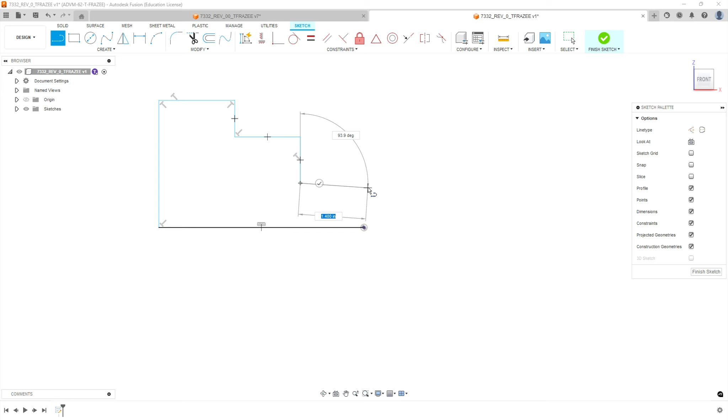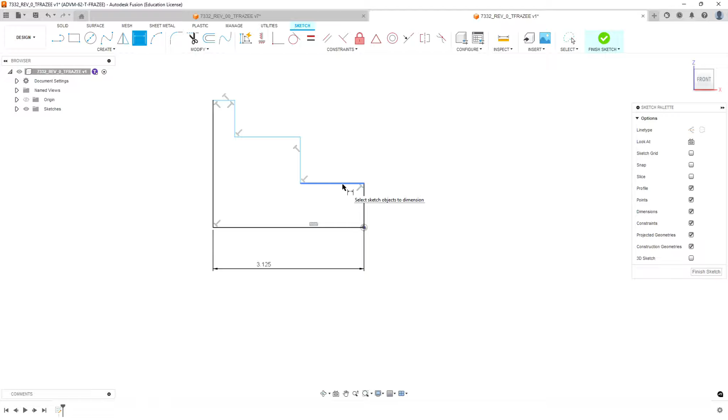Alright, so you should have some constraints that already go in automatically. Our overall length of the part, the finished part, is 3 inches. Set this dimension to 3 inches - the video is incorrect. And if we look at our drawing, the length of this leg on the right, this very first one, is 490 thousandths.

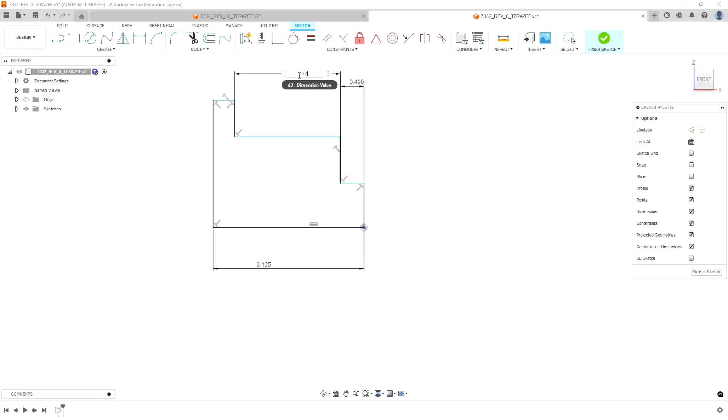Our next one is 1 inch 10 thousandths from that edge. And then our last leg should be taken care of by the overall length.

Now we need to do radiuses. So we have our first one is a 1.496 to 1.498. We're going to do that right at the middle of the tolerance, at 1.497. So 1.497 divided by 2 gives us the radius.

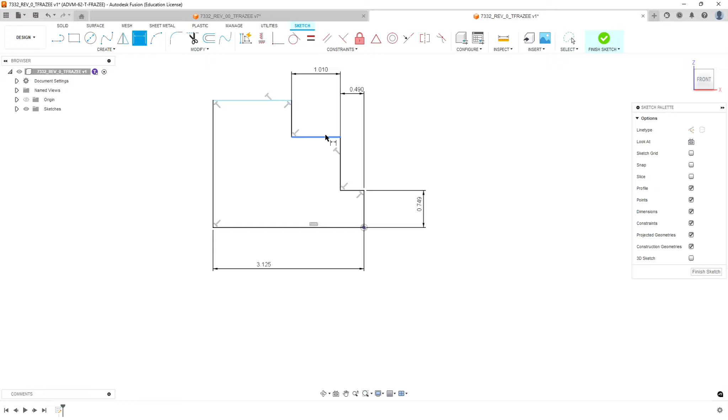Alright, we're going to go back to the next one, and our next diameter is 2 inches 494. We're going to divide that by 2 as well to get a radius.

And then our last diameter is 3 inches, so it's 1.5 for the radius. That should give us a fully constrained sketch. Okay, and this overall length is 3 inches.

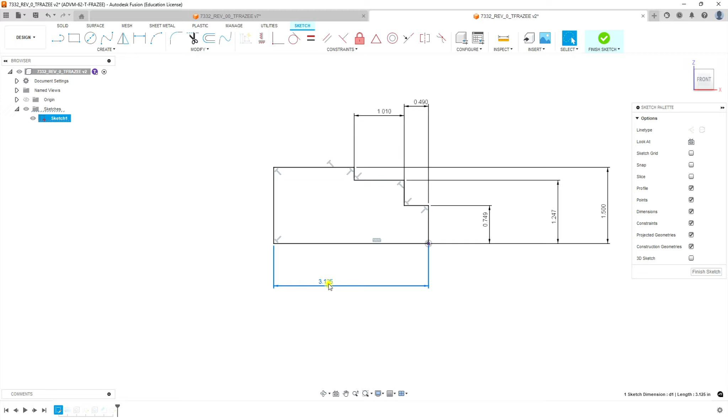Hit finish. We're going to go to revolve. We're going to select the straight line as our revolve axis, and we should have the main feature of our part made now. Okay, next what we're going to do is put the next primary feature in,

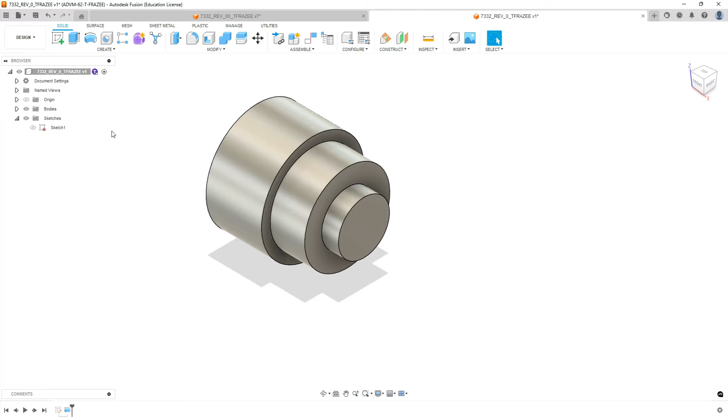which is the hole in the center. We want that all concentric. So we're going to create the hole, and do a plain hole type, no tap, clearance all the way through. We don't care about the drill points because we're going all the way through, so we're going to select all. We are going to pick a countersink hole type so we can put at least the countersink on the top of the hole there. This software doesn't have the capability to do it on both ends, but some software does.

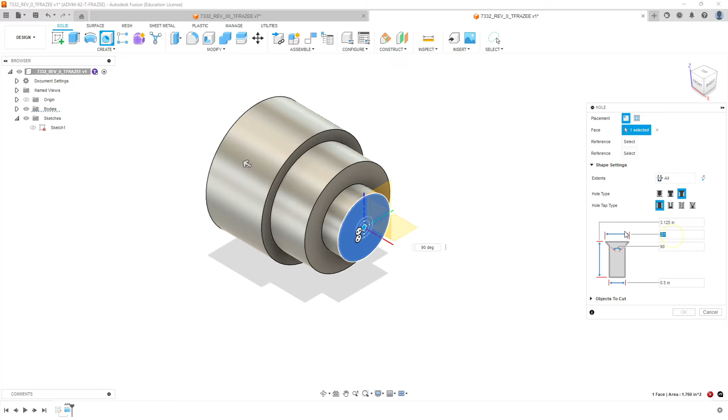Okay, we're going to select our plane and move the hole to snap to the center. We need to look at our parameters: our hole diameter is a half inch. And our countersink angle is 90, and our countersink diameter is 560 thousandths. Gotta remember that decimal. We're gonna hit OK.

So now we have the hole feature going through the center. Now let's prepare a sketch for the dowel pin hole. So we have a location dowel pin hole that's intended to clock this, so you can take it on and off the machine and have it clocked in the correct orientation. It also keeps it from spinning because we're going to be bolting this with a drawbar going all the way through the part.

Okay, so we need to create a sketch to put this 1 inch from the center. You could use other methods, but I prefer to put a sketch that way we have something hard there that we can change. So we're going to go sketch, and do a line. We're going to go from origin, straight up.

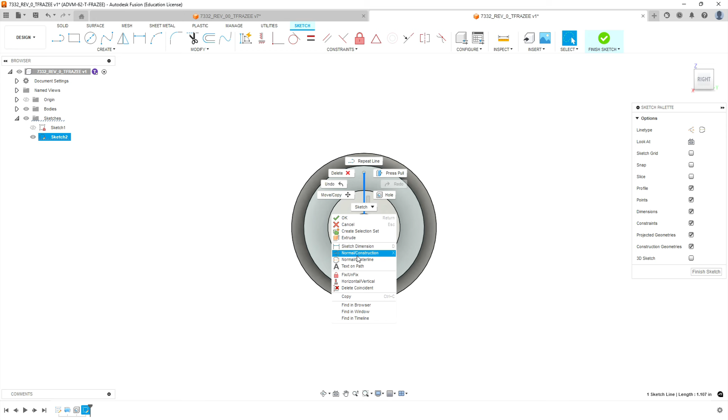We're going to left click on that line and then right click on it, make it construction, and that should be 1 inch long. And there we go, we just finished that sketch.

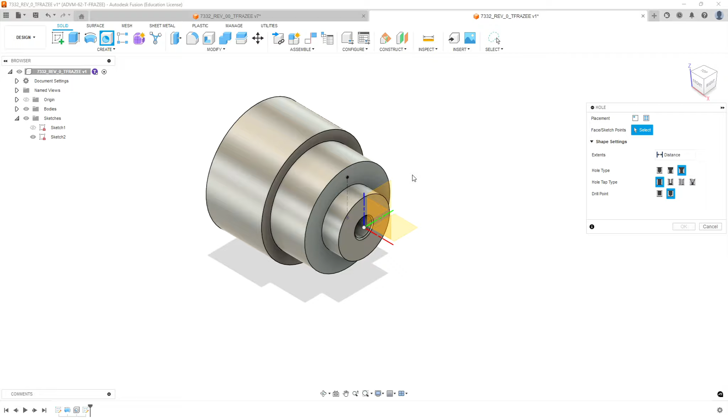Now we're going to go to Hole Wizard and create the hole that's going to go there. So we're going to do the same thing, countersink, plain hole. This one is going to be blind, so we do want a drill point. And then we're going to do our selection, which is on that point we just created.

Now the default size is the last hole size we made. So what we're making is a 0.251 to 0.253 hole.

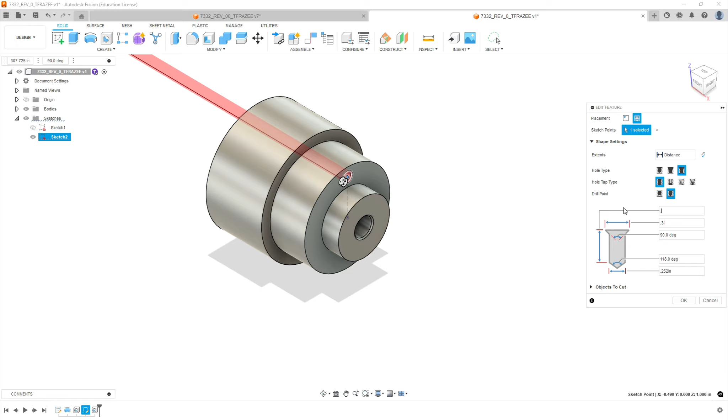Okay, now all we have is chamfers. So we have one here, and to put the countersink on the opposite side, we're going to use the chamfer tool. So let's go to Modify, we're going to go to Chamfer, and our first selection is going to be this outside chamfer here, and they're all different sizes on this thing.

So we have a 50 thousandths chamfer there. And then we're going to add another selection, which will be this edge, which is just a general edge break of 10 thousandths.

Okay, and then we go to the other side, and we need to do a little math to figure out what this one is. We have to convert the countersink diameter to a chamfer dimension. So it is 560 thousandths, and the hole is 500.

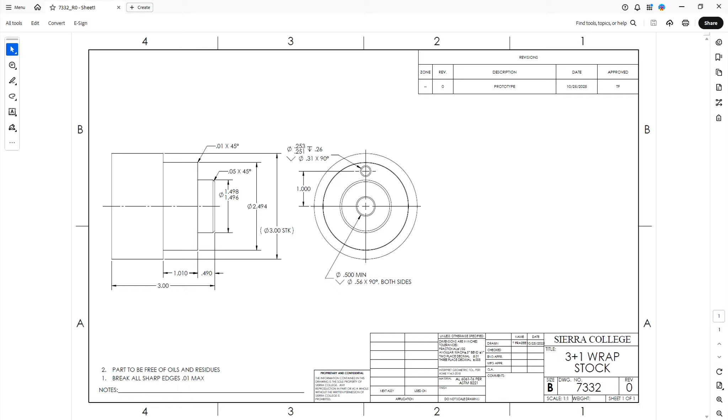So if we get our handy dandy calculator out, you have a 0.56 hole, or chamfer diameter, on a hole that is ½ inch. So we're going to subtract a ½ inch from that number. That gives us the difference between the diameters, but the chamfer would be in a radius. So we're going to divide that by 2, and it's a 30 thousandths chamfer as the conversion.

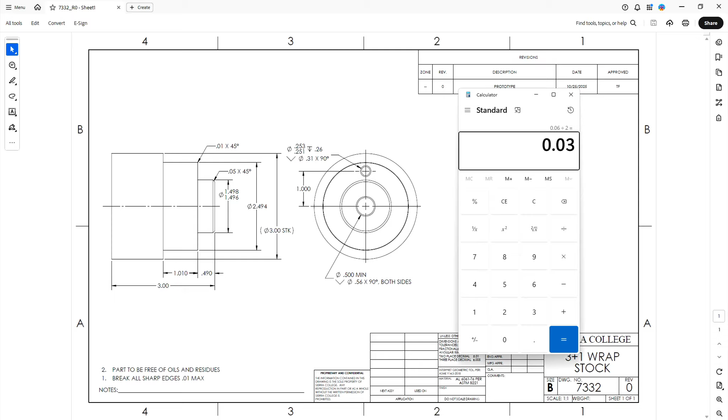Okay, so we're going to go back to Fusion, and we're going to select a new selection set. We're going to pick the opposite end of the hole, and 0.03 is our number. Okay, and we're done with that.

Okay, we've now successfully modeled the part. Make sure you're saving a lot.

Okay, so we're going to make stock on this. We're going to make stock to go around. It's easier to register things with fixtures if you model the stock.

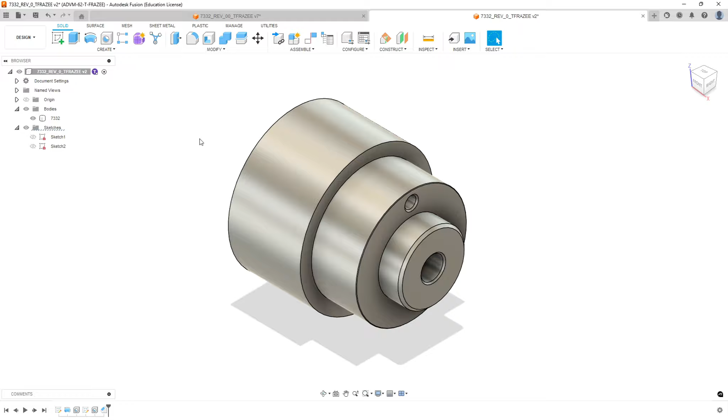So what we're going to do is a sketch on the back side of the part. And there's a couple ways you can approach it. What I'm going to do is create a projection, and we're going to select the outside diameter of our part, and we're going to hit OK.

And so it shows up as purple, but this will tie it to the size of this, and we're making it out of 3-inch bar stock. So if we change the bar stock size, it'll automatically update this model. I'm going to hit Finish Sketch.

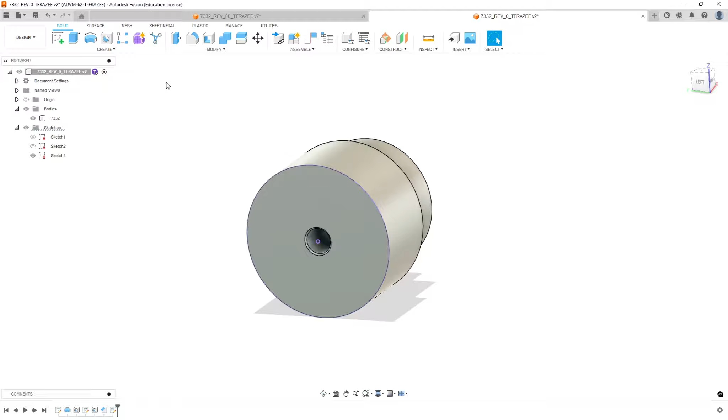We're going to do an extrusion, and we're going to select our outside profile, but we also have to select the edge where the hole is. So we want it solid as if the stock was being created. We're going to go to 2 sides.

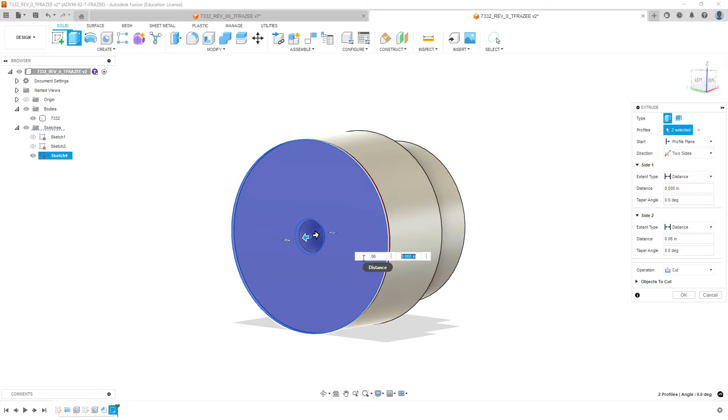The first side is 0.06 and the second side is going to be 3.06. So we're taking 60 thousandths off both sides. Yeah, it looks like I got those boxes backwards, so bear with me here.

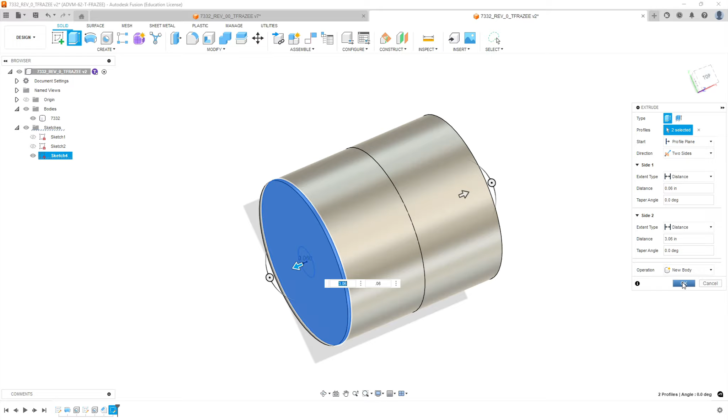And then we don't want it to be a cut, we want it to be a new body. Okay, we can see the new body's enveloping the other model. We hit OK, and the second body shows up here. We call this stock.

Okay, we're going to right click on stock and go down to opacity control, and make it 50% so we can see our part inside the stock. Okay, we have our part modeled, we have the stock around it modeled.

Now we need to bring in our vises. And we're also going to use a device called a V-block. So pull in a vise from the assignment, and we're going to pick 1 1/8 inch tall parallels.

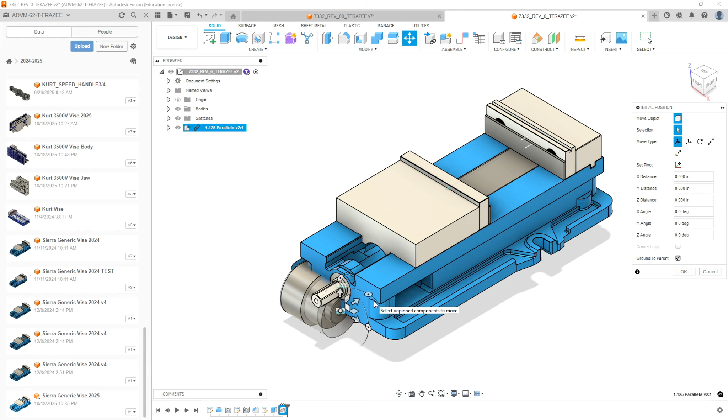And we're going to rotate the vise in the orientation for the first operation. So we need to rotate this 90 one way and 90 the other way. And let's move this out of the way because the first operation is going to be just milling this face here.

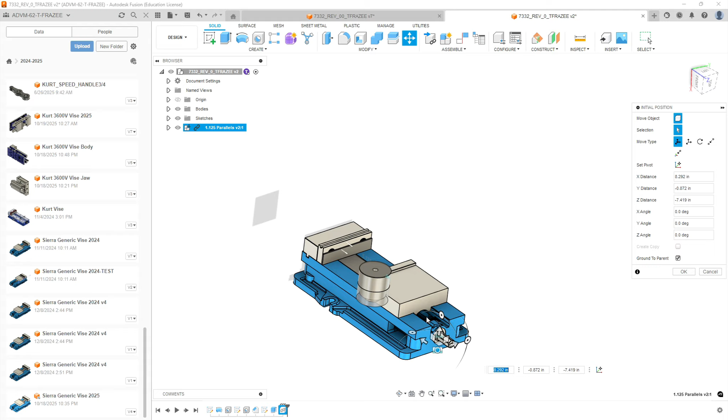Now I found assembling these things with cylinders is a little tricky using square fixturing. So we're going to hit OK. For our first entity we brought in, we need to unground it from parent so that our joints can be successful.

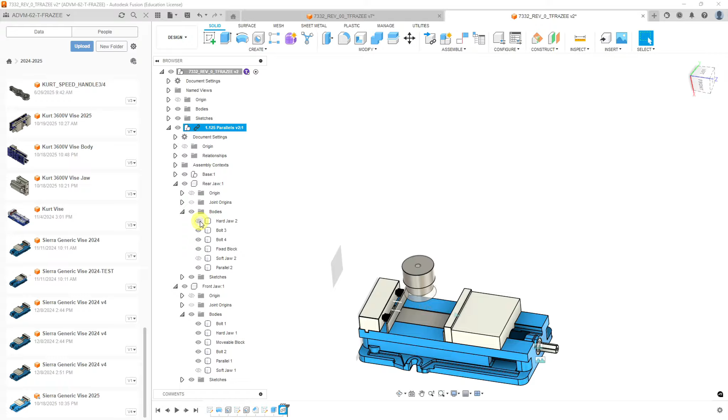And we're going to expand our vise here, and we're going to do something a little unorthodox, but I want to expand the rear jaw and the front jaw and look at all the bodies. So make sure the bodies are open, and we're going to hide the fixed jaw just temporarily on this, and we're going to go to joints.

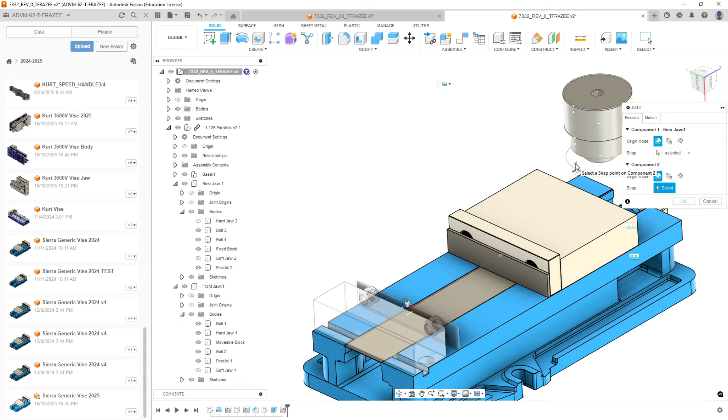This will allow us to pick on the back plane of the parallel, and then we can pick on the corresponding location where it would hit tangency on our cylinder. Okay, and that way it'll align it. And again, you have to have snap points enabled for this, to have those icons show up.

And we're going to make the hard jaw visible again. We're going to put a V-block in here that's going to go where this parallel is. You can put 2 parallels under this when you machine it, but it's not going to be there. So what we're going to do is hide the parallel on the rear jaw, or the fixed jaw. Okay, now we can collapse all this stuff up.

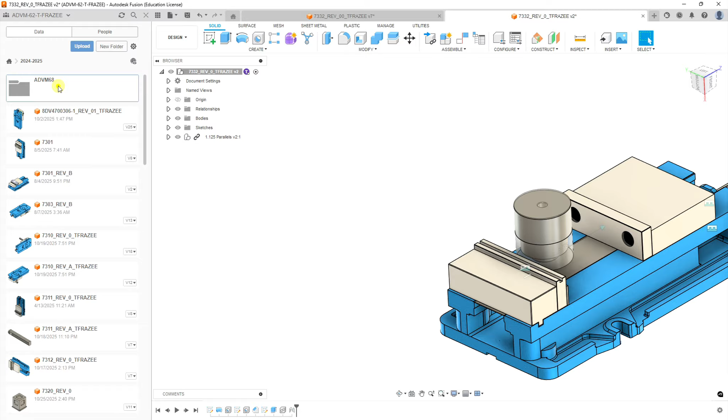And we can go to our library and pull in the V-block that's part of the assignment, and pull that over. We go 90 and 90. That puts it in the orientation the V is going to grip onto the cylinder.

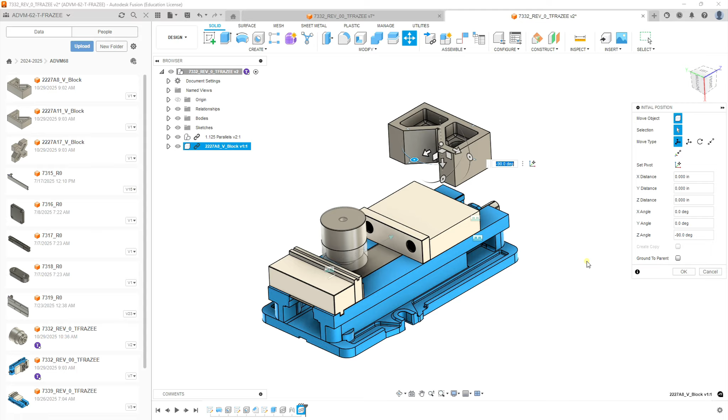We hit OK. Now we're going to go to joints. We're going to pick the center of the rear jaw and the center corresponding spot on our V-block, and we're going to hit OK, and that should assemble it where it needs to go.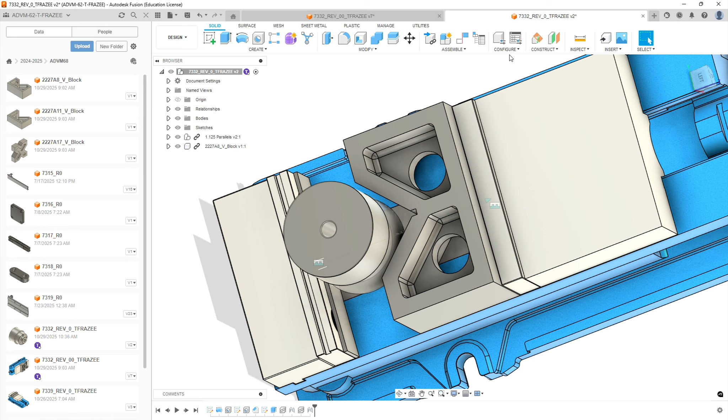Now, so that the V touches the cylinder and this looks convincing, we're going to go to tangent relationship, and we're going to make a relationship between one of the flat faces and the cylinder of our part, and that should emulate our first operation.

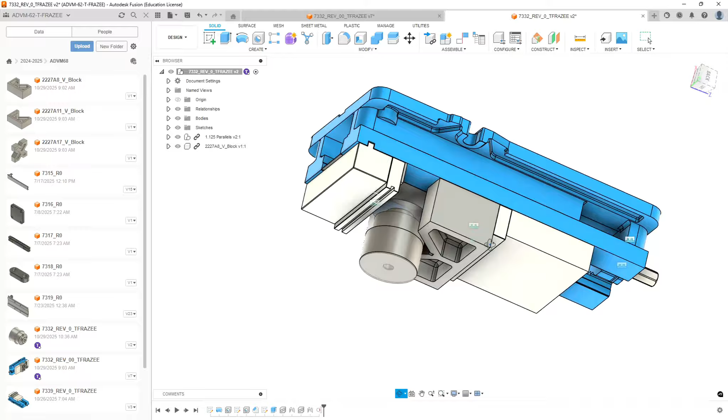Now we're going to go to the opposite side and look at flipping the part like this. So let's hide our vise. And we're going to bring in a second instance of that vise with the same height parallels. Inch and an eighth. Hit OK.

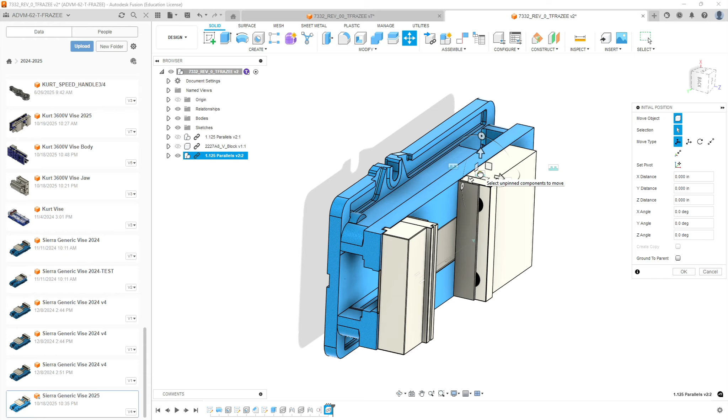I can't see our part. Let's move it. We got to rotate 90 like this. Move it into position.

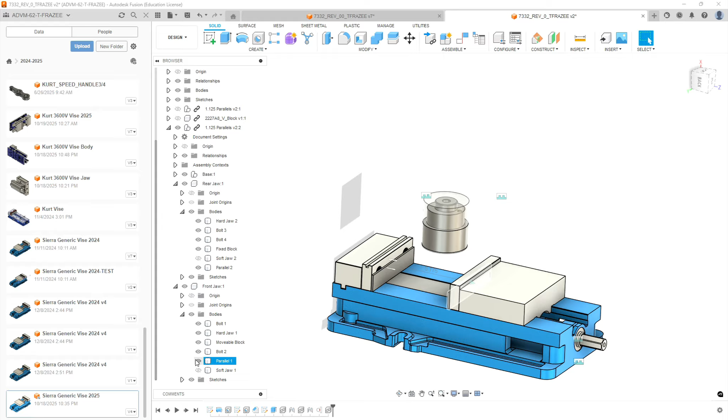Hit OK. We're going to expand that vise, front and rear jaw, bodies for both. We're going to hide the parallel in the back, and hide the hard jaw temporarily in the front. We need to make the joint on this between the finished part edge that's been milled off on the face and the parallel.

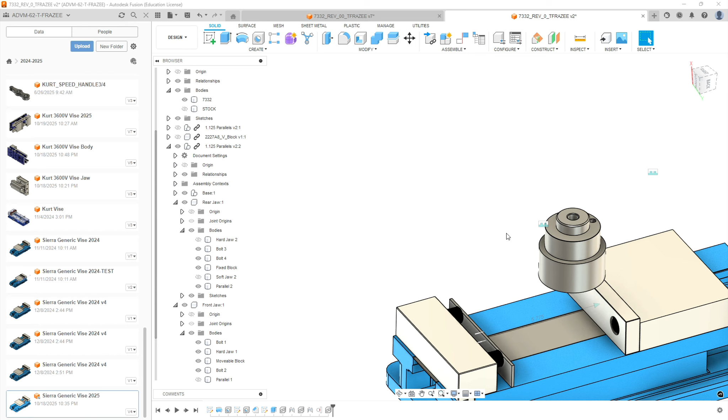So to make things easier, we're going to go to the bodies and hide our stock model, and we're going to assemble this with a joint from the back of the parallel to this corresponding edge on the model. And the reason we're doing that is this bottom edge here has been machined to finished size.

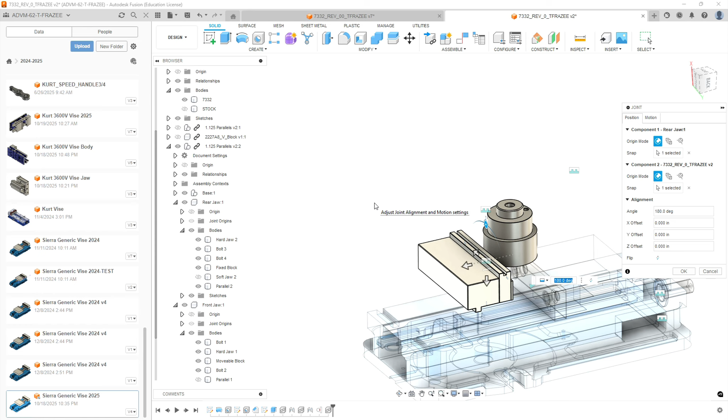So if you pick the stock, your setup's going to be off by how much you removed from the first operation. Alright, we're going to hit OK.

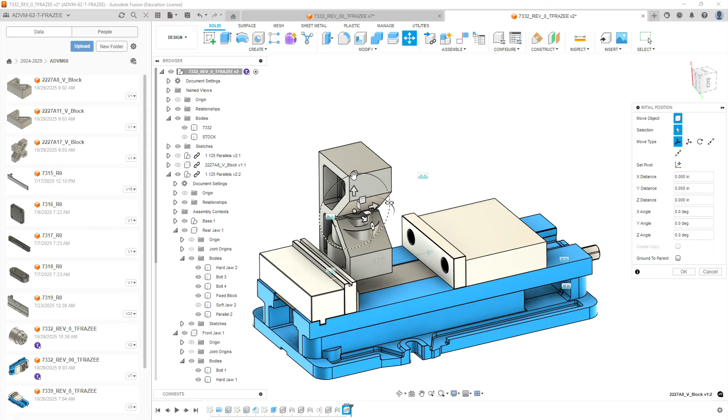Now we need to go in and bring in a second instance of the V block. Need to put it in position. Two 90-degree flips.

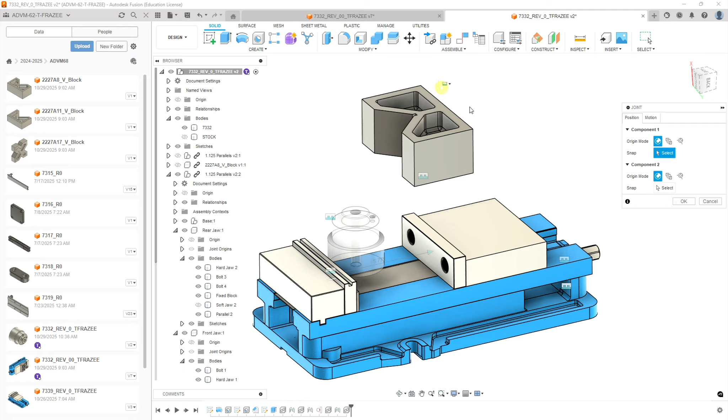We're going to assemble, we're going to joint, center of part, center of the V block, hit OK. That puts it in place. Now we need to go to assemble and put our tangent relationship between the V block and our part. We're going to hit OK.

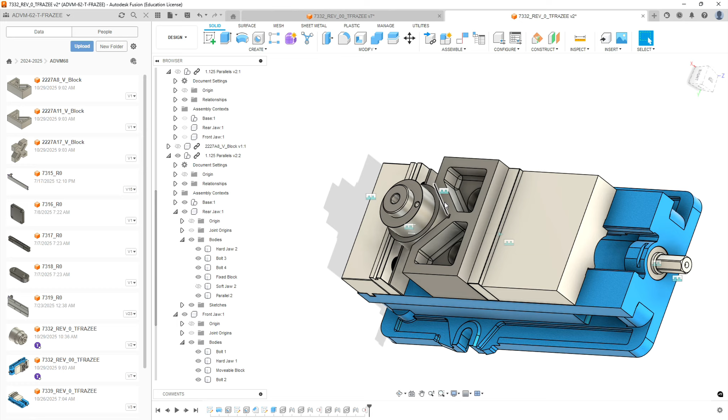And we can go back and make the stock visible again. You are going to need it for both operations. Okay, let's hide the bodies, hide all this stuff. We don't need to see any of this anymore. Okay, and now we're ready to go into the manufacture mode.